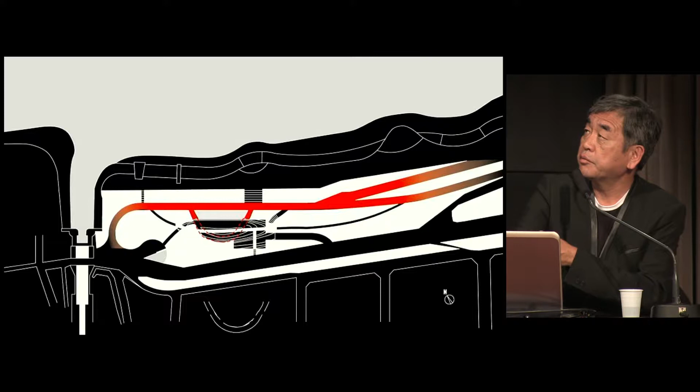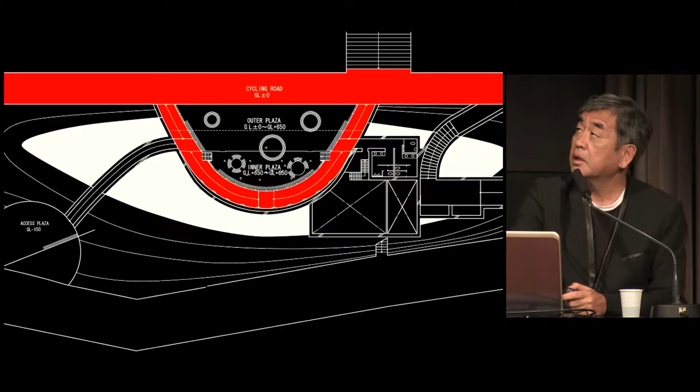This is one of the oldest canals in Japan, and this museum is for the memory and history of the canal. The plan is very simple: the walkway and museum is part of the walkway. And the section relates the river and the town.

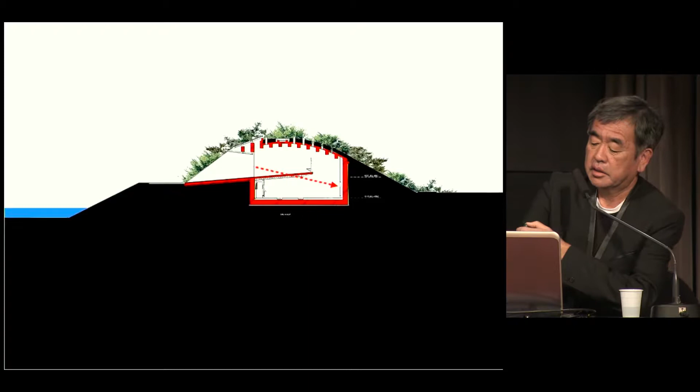Actually, the tsunami hit that part of the building, and those houses were unfortunately destroyed by the tsunami. But because of the sections, our building was not destroyed—though we were just lucky. This is a view to the river from the building.

Another project I did for the up-north area is this museum, the Hiroshige Museum. Hiroshige is a very famous ukiyo-e artist from the 19th century, and I designed this. Material is of course very important for me, but this hall is very important.

Because of the mountain, materials for the buildings all came from the mountain, and energy also came from the mountain. They didn't have gas companies or electric companies—people totally relied on the mountain.

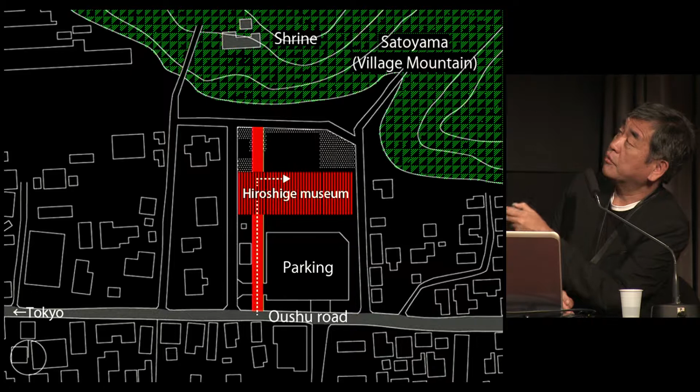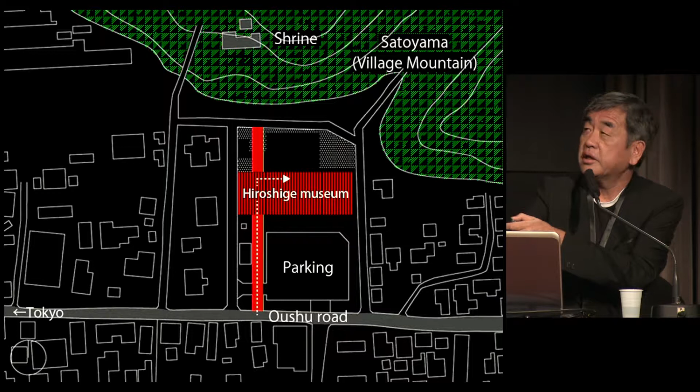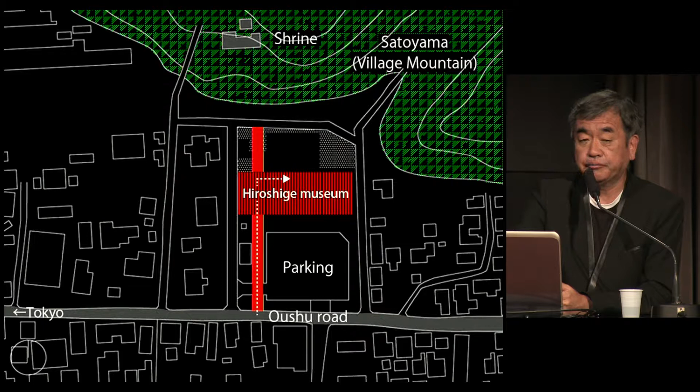If we make the entrance face the parking lot, people again forget the mountain, and the backside becomes just a backside for machines and trash areas—that kind of thing. So it's very, very bad. Instead, I cut the building like that, wanting to connect the town, the village, and the mountain again—the human and nature again. That is the goal of this project.

Going back to the hall—this is the hall which connects nature and the village. And this is the entrance, which I thought was the backside, but no, this is actually the front side of the building. As for materials, I tried to use local material as much as possible, because smallness is important for the detail.

And the space making method is layering. The very light screen is overlaying, creating layers of the spaces, which is also to connect human and nature.

And this is Adobe. Professor Dodd experienced the clay. I also use the clay, the earth for the building. But this is in a small village again, but to use this Adobe method for the building is very exceptional in Japan. That method, Korea and China, they often use Adobe, but in Japan we have had wood, and the wooden structure is a major method.

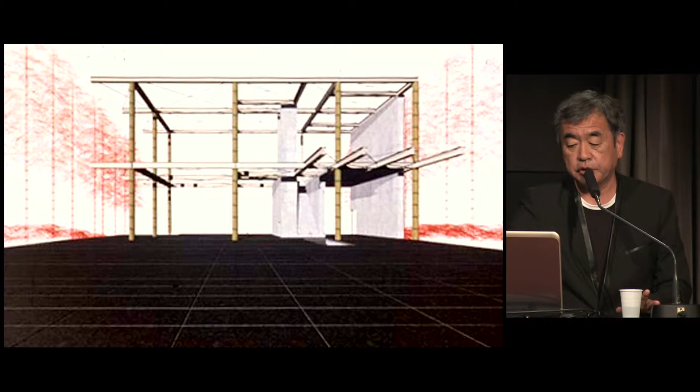The next material is bamboo. Bamboo grows very fast, but bamboo was only used for small products. I want to extend the possibility of bamboo, so we used bamboo trunk for the formwork of concrete, injecting concrete into the bamboo trunk. And this is my first bamboo house.

And the second bamboo building happened in China. Also in China, bamboo was very, very important as a plant. So we tried to avoid the cutting of the land. The building was following this unique landscape.

And this kind of semi-outdoor space is also to connect nature and human, as people are drinking tea in this kind of connecting space.

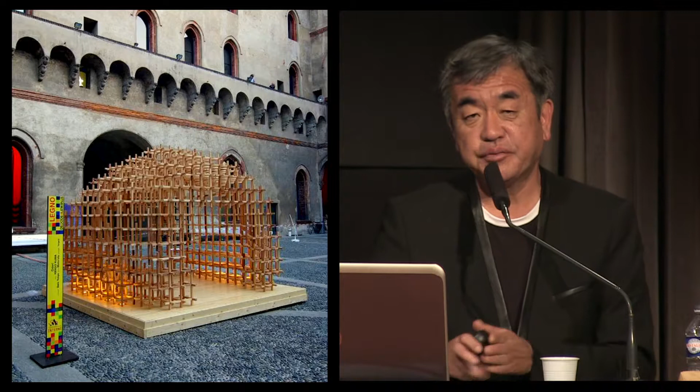And wood again, my idea is not using the big glulam, the beam or clamps. I want to use small elements as possible to extend small elements to the big scale. The smallness and bigness should be continuous. That is my idea. And also, if we can make the building by ourselves, the self-made building is a strong building. Socially, it is very strong, I think.

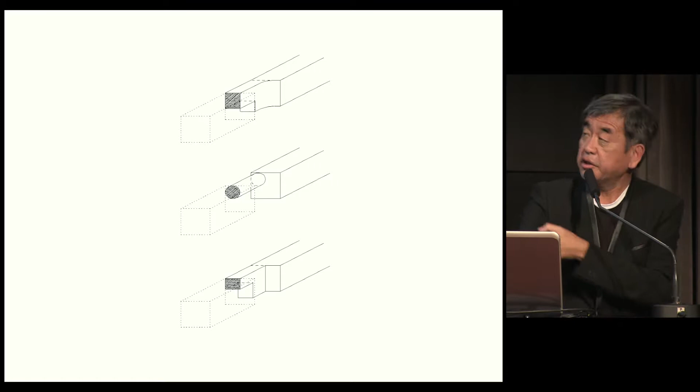And the hint, I got the hint from the traditional toy. The name of the toy is chidori. Chidori means 1,000 birds, it looks like 1,000 birds flying in the sky. This is a unique joint system, with 3 types of joints. First one, second one, third one, and we twist the second one, and we can fix the joint. It's a very magical system.

And so we worked with my student in Milan, and the student made this pavilion in 5 days. It's very good practice for them.

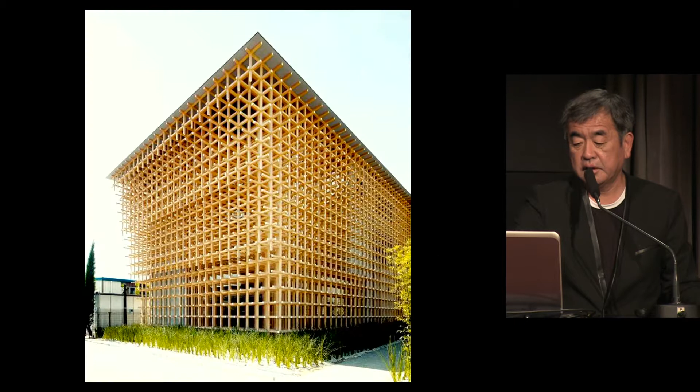And the next step, we want to extend that system to a permanent building. My colleague, Professor Sato, tested this system, and his conclusion is that sticks 6 centimeters by 6 centimeters are strong enough to support a 10-meter building. This is a section of the building, and this is the completion of the building. So we could avoid the column and beam system. The very small sticks can support the big building.

As a next step is to create a bigger structure, as a bridge. But still, I want to choose a small unit as possible.

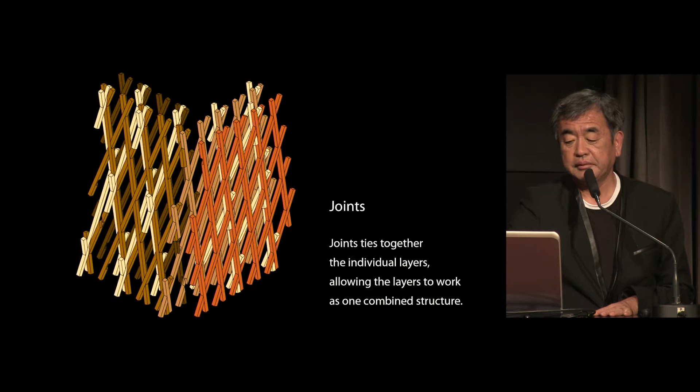As that system, so we extended it to France - Tuileries Gardens, Tuileries Park - we built a temporary pavilion there. With French artisans, they did a perfect job for us, so we were very happy to work with them.

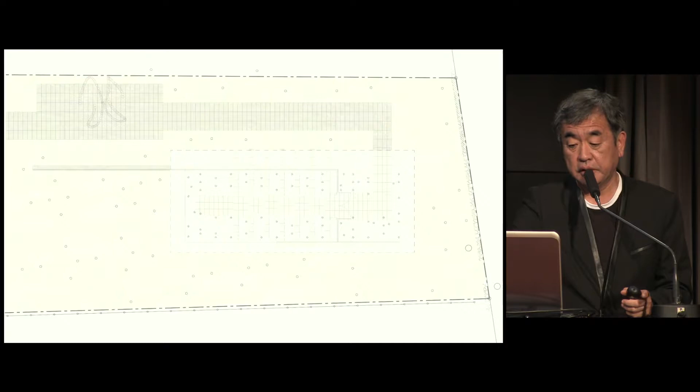This is a new project - a chapel in the forest. The birch forest is beautiful in this district, so I wanted to use birch trunks for the structure of the chapel. This is the plan - the forest and the columns merge as one.

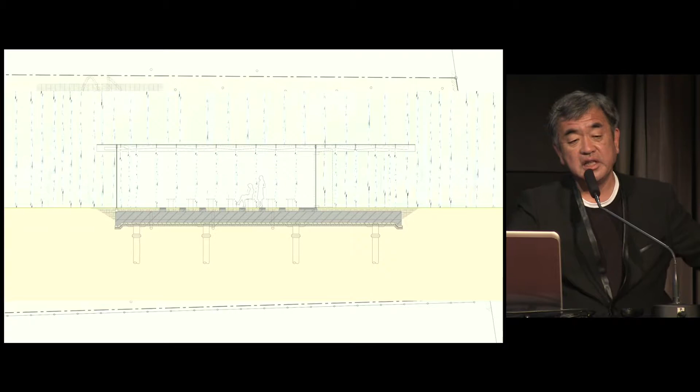The roof is made of glass, so we could delete the border between exterior and interior. From above you can see the shape of the building, but from ground level, the border disappears. Moss covers the floor and interior as well, and the benches are made of transparent material so people can feel they are almost outside.

In the center of Tokyo, I also want to bring back wooden buildings. In front of the famous Sensoji Temple, I love that gallery very much because it's a one-story building - it used to cover this whole area as a one-story building. But in the 20th century, those concrete boxes destroyed the beautiful fabric of the city.

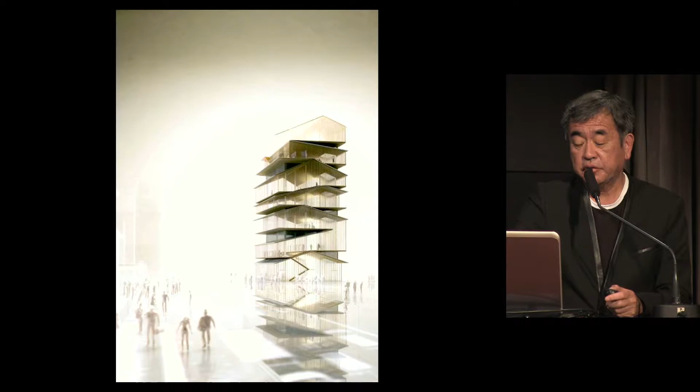So I brought that idea to the city hall - it has earth floors covered by wooden screens.

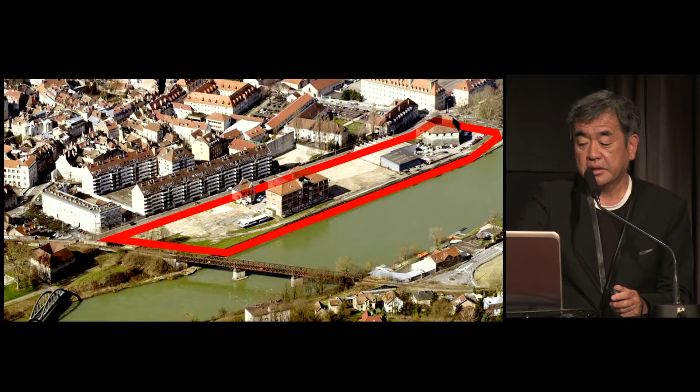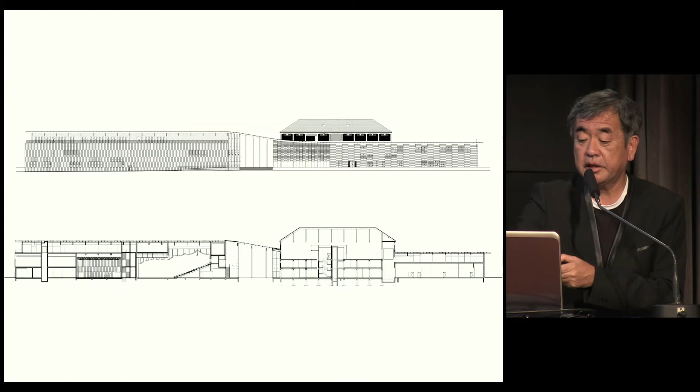This site was a kind of abandoned area, facing a beautiful river, but people didn't want to walk along this area. My idea is to reconnect city and nature by cutting the building like that. The same method as the Hiroshige Museum. As a waterfront and city front, so we redesigned it.

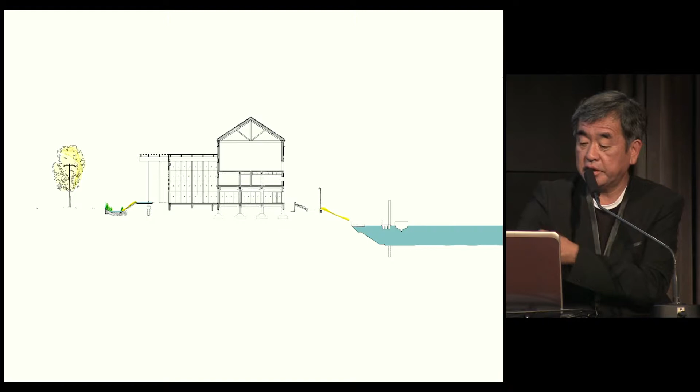The local material, in that case, is birch from the mountain. The whole point is connecting city and nature again, inviting people to nature. This kind of design.

The effect of light - I like the effect of light. The porosity of the facade is creating the effect.

And this is a new Olympic stadium. So we are designing the new Olympic stadium. The Olympic stadium is very important for myself personally. In 1964, we had the first Olympics, the Tokyo Olympics.

And Kenzo Tange designed a beautiful gymnasium. Probably you know that beautiful gymnasium. It's a symbol of the period of concrete, a beautiful concrete building with curvatures. When I was at the age of 10, my father brought me to the Olympics, the gymnasium by Tange, and I was so shocked. What a beautiful building. And on that day, I decided to become an architect.

And after that, Kenzo Tange was my hero.

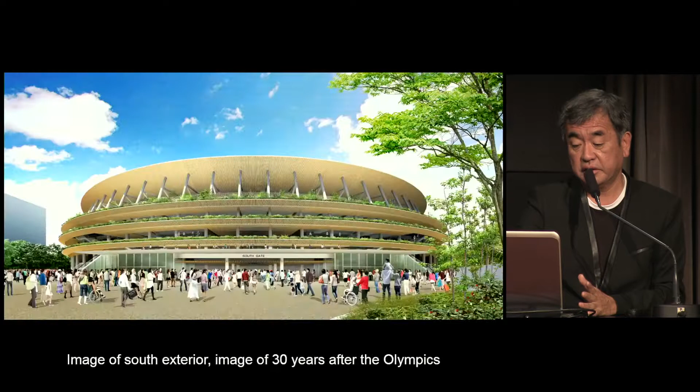For the 2020 Olympics, I think wood is the appropriate material, not concrete. The small sticks of wood create the building, for the facade and also for the structure. Every structure is a composite structure system.

And I got a hint from this, the temple. This is the oldest wooden building in the world. It was built in the 7th century. But still, the building was not burned. It is existing - it's amazing because of this section.

This series of roof eaves are protecting the wood. A good thing about wood is if a unit was damaged, we can replace it easily. But with concrete, it is difficult. For that building, some parts were of course replaced, but the building survived since the 7th century.

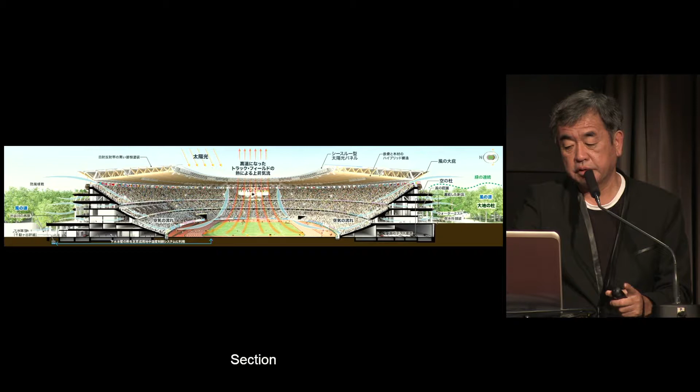And also the shrine close to the stadium has the same section - layers of roof protecting wood. This is the interior. We did a simulation of the wind.

And this is a walkway on the sky. We bring back the creek - in the 20th century, people buried the creek, but we try to recover it.

And recreate the creek. In China, Wang Shu - you know Wang Shu - invited me to the museum for his university. Wang Shu used brick.

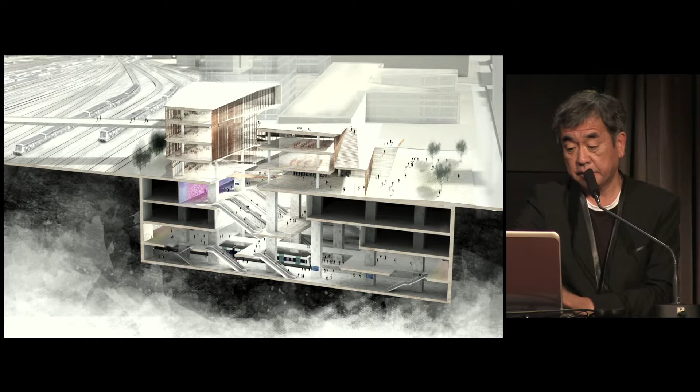Material-wise, we are using wood for the station. The Albert Kahn Museum is close to this building. The Albert Kahn Museum has beautiful Japanese gardens.

Construction started 3 months ago, combining wood for the building.

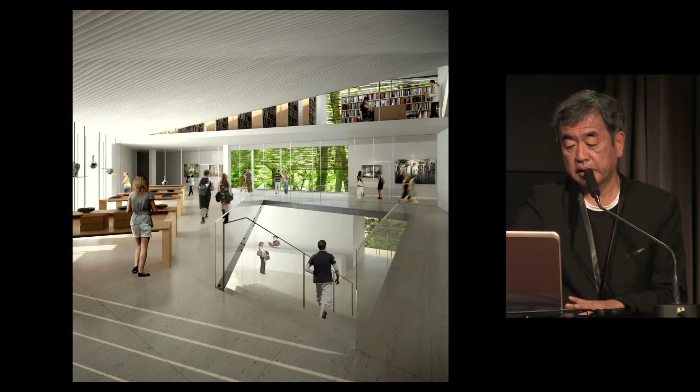And in Chamonix, we designed a small office for an Italian company.

The local wood can always connect the place and the building. Using local wood is important for us.

The last few projects are very experimental, for sustainable lifestyle. I always start from the small unit. In this case, the water polytank is the unit.

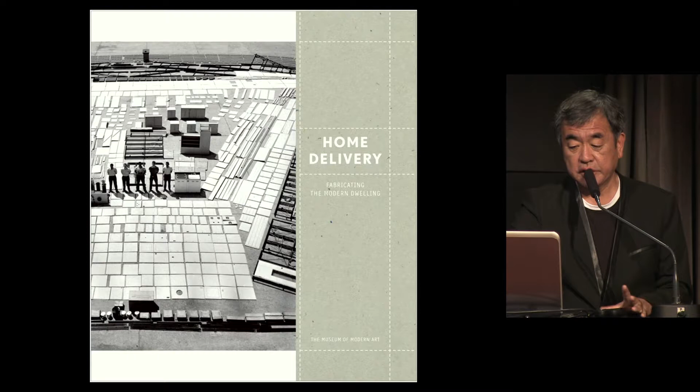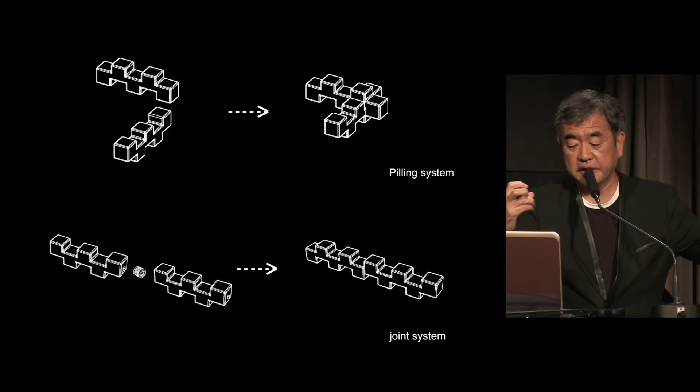This is for the MoMA exhibition, and this is a polytank we designed. This polytank works as a pipe for flowing water.

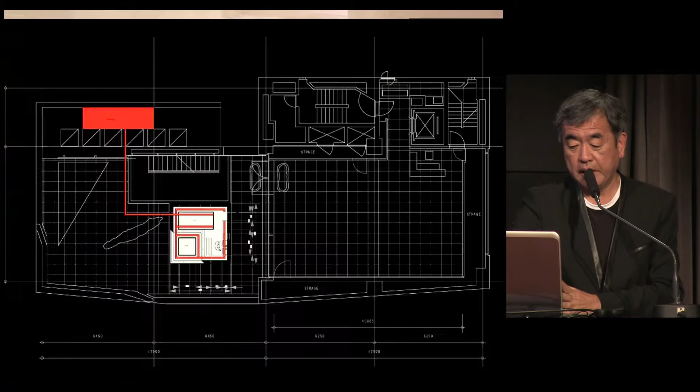And this is the exhibit in MoMA. And after that, we actually designed a small experimental house by using that small unit.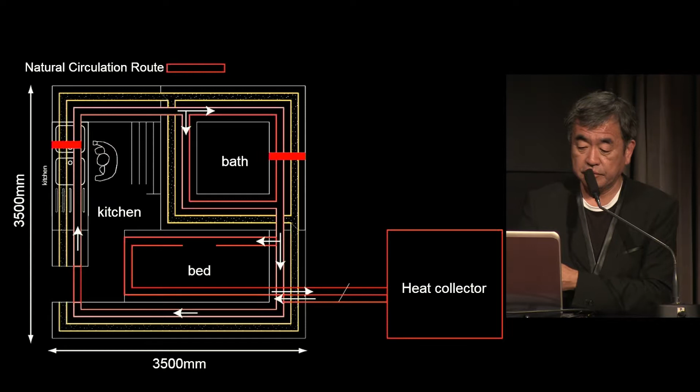This is an energy self-support system. The infrastructure is not needed for this system. We have a heat collector here, and the heated water flows to the building, through the wall and floor. In the 20th century, there was always separation—pipe system, structure system, furniture—everything divided and separated. But I want to bring back integration again.

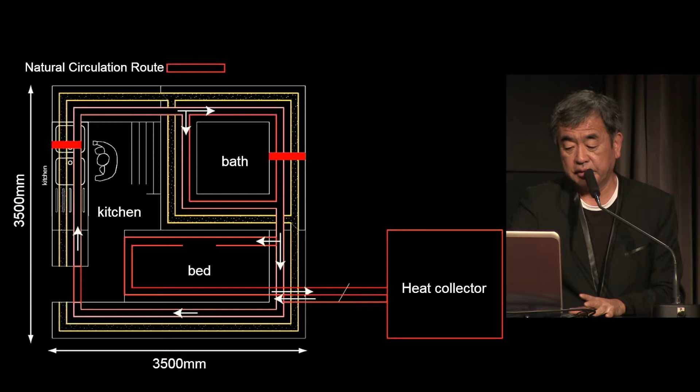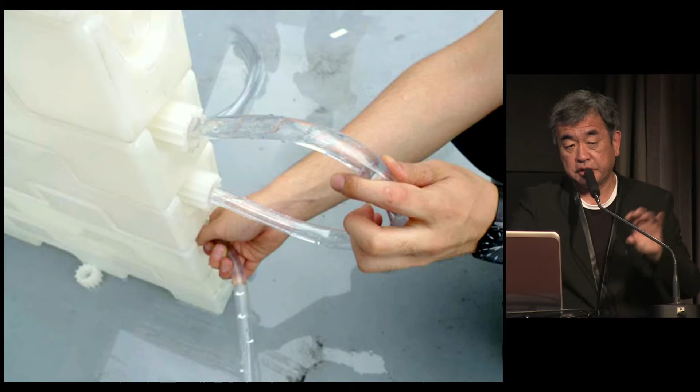Our students made that building, made that pavilion. As a pipe system, the units are connected, and then it's covered. This is the interior—a very small bed, and this is a small kitchen. But the idea is one single unit that can make everything. It is similar to the system of the human body. A single cell can create anything. So any organ can basically be created from one single cell. The model is the body.

And the next step—one achievement is always a hint for the next project. This is a small tea house in Beijing. The structure is the tank. This polytank supports this small tea house.

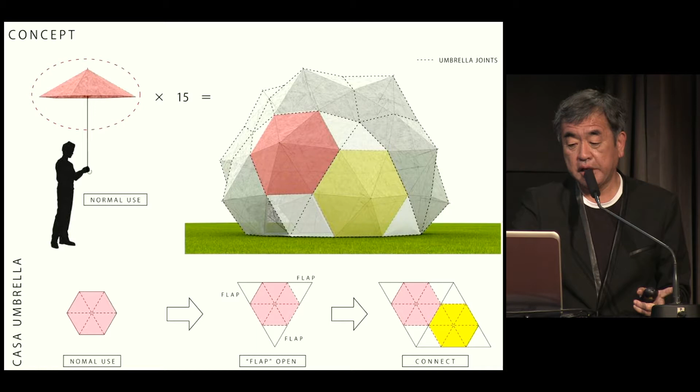It's a kind of refugee house—if one can carry an umbrella, we can build a refugee house with friends. This was inspired by Buckminster Fuller's idea. The umbrella unit is very unique, and we can find friends easily. 15 friends can make the umbrella house together.

And the fabric—recently I love to use fabric. It's a hint from the Chise, a house for the Ainu people. The Ainu are an ethnic group living in Hokkaido, the north area. They had a very unique culture, but it's almost disappeared. I like the Ainu house—the soft material keeps air inside, and the air is used for insulation.

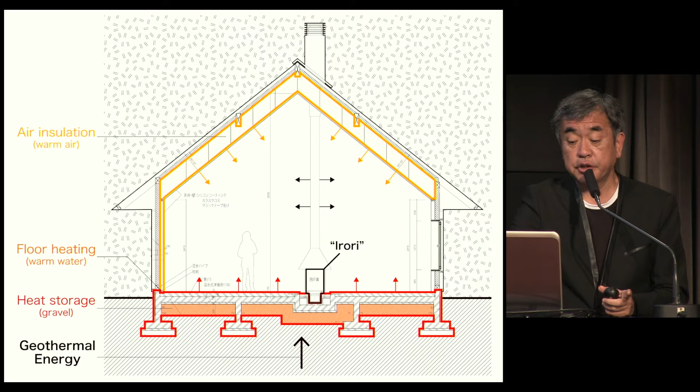So this is my fabric house. The structure is wood, but the wooden structure is covered by double fabric. Between the fabric layers we have space for air circulation, and even at minus 30 degrees, people can live in that house. The Ainu people also used a system where the ground stores energy, and we followed that system. I stayed the night there at minus 30 degrees and I'm still here—only the fabric is enough.

There is a lesson from the Ainu people.

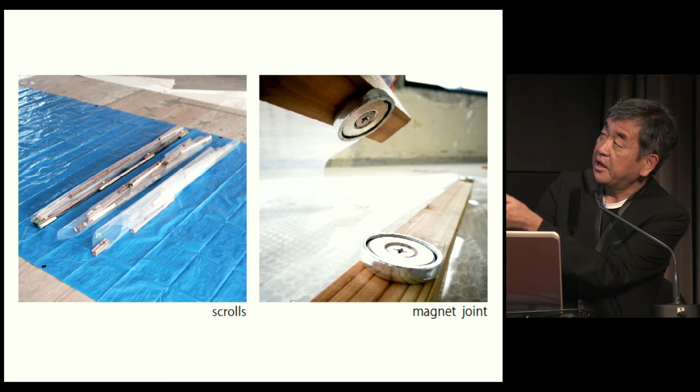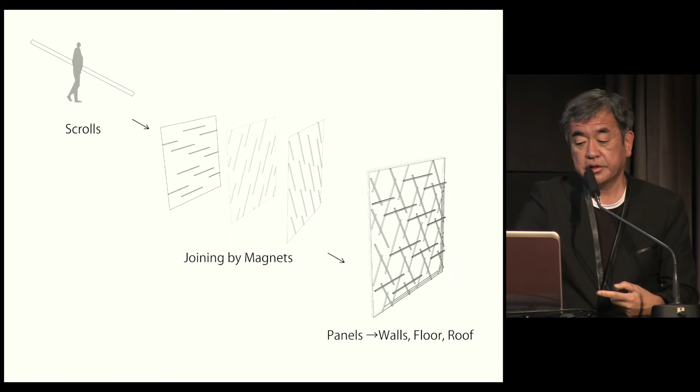This kind of fabric is also used for a portable house—it's a collaboration with a temple. For that case, we used ETFE, wooden sticks, and strong magnets. The good thing about ETFE fabric is it can roll up, and three layers are tied together to create a rigid wall. This is how to make the portable pavilion—the strong fabric is strong enough to support the building.

Besides those small pavilions, going smaller, I started this project after the earthquake, the East Japan disaster. This is a favorite product—we worked with craftsmen from the up-north area. I invited some product designers from around the world, like the Bouroullec brothers from France. They designed this beautiful kokeshi—you know, kokeshi is a very famous wooden doll from the up-north area.

They loved kokeshi, and they also said the most beautiful attitude of Japanese people is ojigi, the bow. So the kokeshi can bow like a Japanese person.

So today, I wanted to show the possibility that a small element, a small unit, can change the world—that is the basis of my practice. Thank you very much.